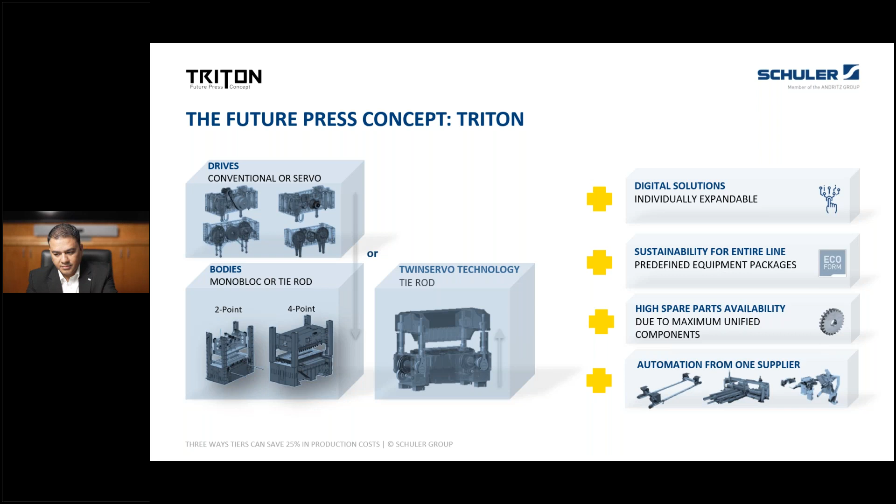When I was talking about the modular design, we all know that modularity is a principle. An immediate example comes of a car. If I want to buy a car and have less money in my pocket, I can still go and buy the basic model and then upgrade it later with whatever modular things are available - for example, a 7-inch screen display on my car.

With TRITON, you get increased output because most of them are built to that extent, like servo presses, and more availability with different automations as well as digitalization. We also have faster setup with offline simulation programs, enhanced flexibility for the dies and the process. You can do certain things offline and then bring it when the press is ready for production.

Reduce training time for new workers - most of our software or programs which come with TRITON presses are intuitive. It gives you enhanced things and they are graphic driven, plus videos. It helps customers and workers pretty fast to come onto a level which is required by the company.

Increased organizational efficiency - you can have the same control, visualization, depending on the different market situation you're in. So new processes, digitalization, increased output availability, and advanced press diagnostics leading to OEE. This is a buzzword now - each and every organization is trying to achieve OEE to the maximum, because they want to make more parts per shift, per hour, per day, or annually.

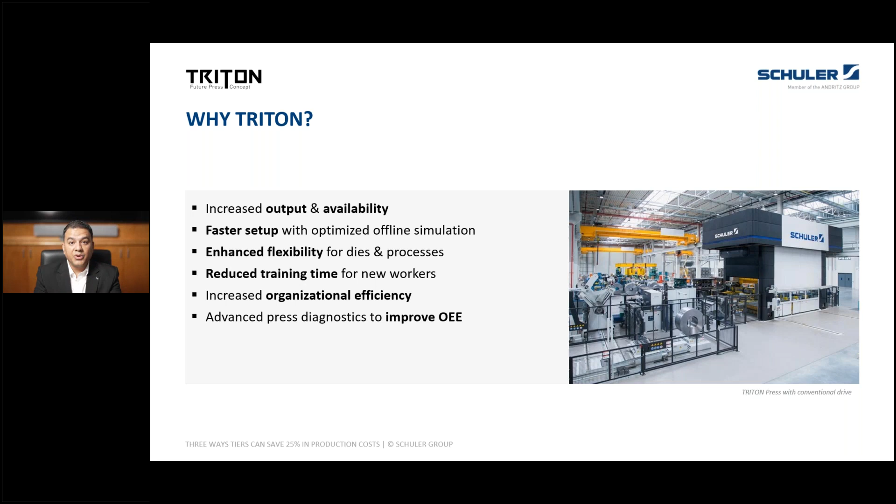So, 3 ways a company can save up to 25% in production costs - we have curated 3 main topics for you all. It talks about technology, digitalization, and operations. Let's take a theoretical example putting it at 100%: technology contributes close to around 70% of the entire cost, digitalization close to around 20%, and operations at around 10%.

Now, most companies have a good amount of skilled labor, so they can do away with things like simulation software if they're already doing it. So you can do away with those 10%.

But when I'm talking about technology, it has subdivisions to it, like rigidity of the press, performance of the press, how much energy saving I'm doing on each part, each component, family of parts, higher efficient motors that I'm using, efficiency of these motors, how much I am minimizing the higher off-center loads, transfer with anti-vibrational damping, which is Schuler technology again, which we will see in one of the videos as well.

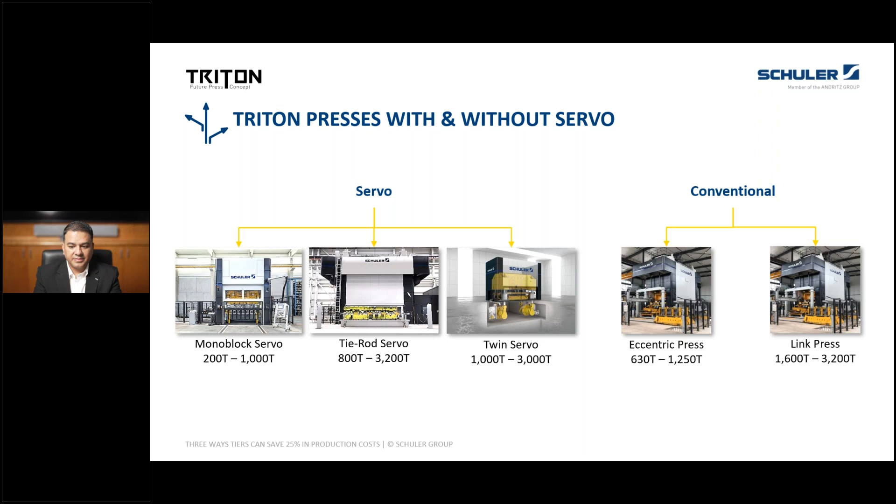Servo presses are quite efficient, directly attached to the main shaft or drive shaft without reduction gears. You get high optimum torque even at slow speeds, and you have water cooling, whereas earlier it was air cooling, which was much more difficult with flywheel presses. You only had sinusoidal waves, so from TDC to BDC it would be constant.

With servo presses you can control how your slide behaves from TDC to BDC. I joke around with customers about this - in humans you've got two main dates, your birth date and your death date, and everyone is interested in what happens between these two dates. So my joke for the presses is everybody is interested in what is happening between the TDC and the BDC. We are all interested in this zone only. That's why with servo presses we get more time for transfer, for lubrication if we're performing anything, and part transfer if there's a rollover in between. We can take much more into consideration with a servo press.

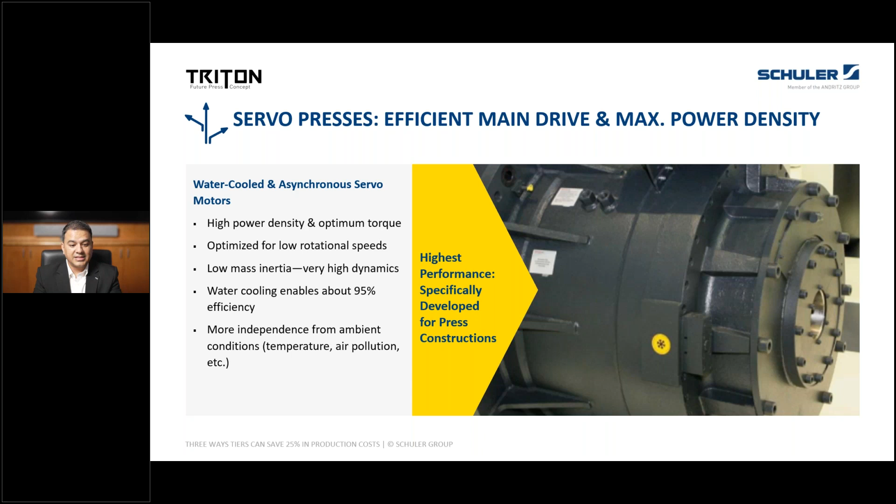Here is an example of the same. On the left-hand side you've got a TML, a link-driven 4-point 1100 ton press with a table size of 5 by 2.2 meters. When I'm talking about tonnage, I'm referring to metric tons, not US tons. The total consumption for this particular press was around 11.04 kilowatts per hour. Let us consider this as 100% of the energy utilized.

On the right-hand side, the center graph, the total consumption using the same 4-point servo-driven press was 8.18, which is close to around 26% less energy. The component was similar to both presses, and we were running at around 14 parts per minute for the continuous run. We measured it with a 4-quadrant counter EVU measuring device, and the measuring time was close to around 15 minutes. So you can see when utilizing a servo press, the energy consumption is approximately 26% less.

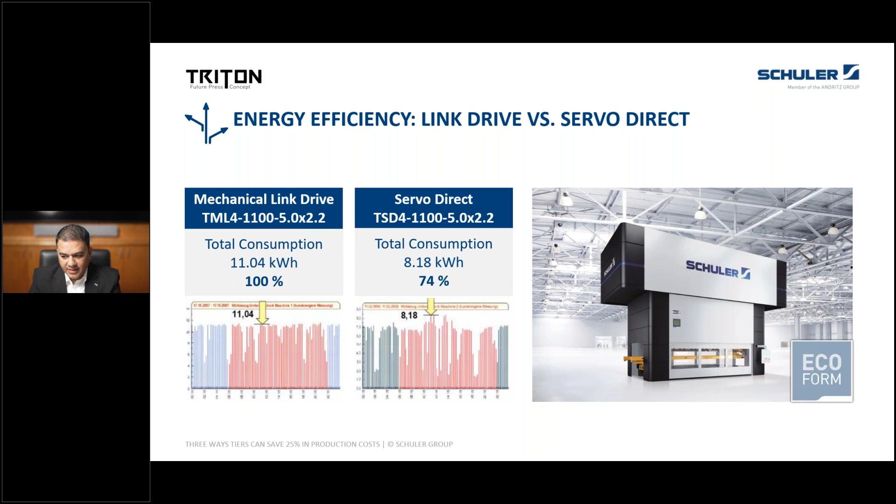Energy efficiency and sustainability are much more important today than they were earlier. Schuler is bearing down all relevant parameters in plant process technology, whether it's a matter of saving electrical energy, cooling water, air, space requirement, machine configuration, process optimization, and many more.

TRITON presses use energy efficient components, like I mentioned earlier. It is standard - most of what's shown on the slide are standard, except the noise absorbing cabin or sound enclosure. Most of the things which are much more common on the European side for less energy consumption are illumination with LEDs, and main drive motors using a torque motor with servo drive, which can be up to around 96% efficiency. There's also hydraulics and powertrain, of course, with optimized mass inertia, fewer moving mass with the gears, and less friction in the crown.

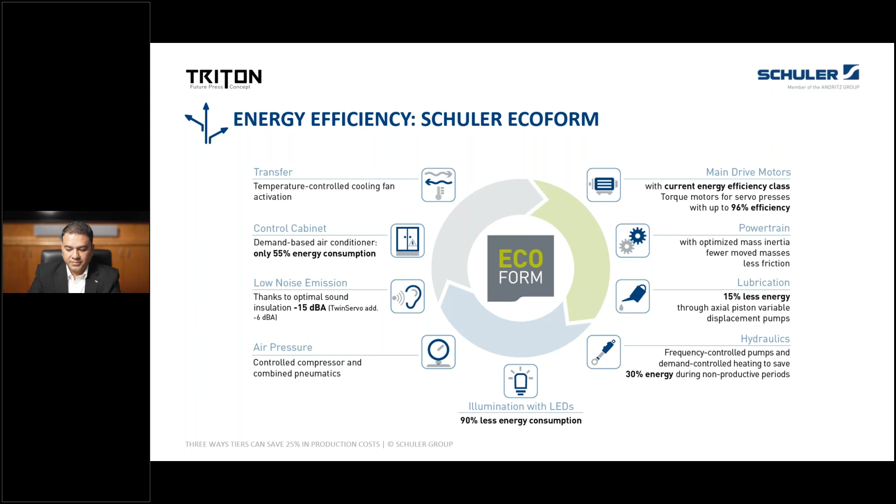One of the packages we talk about is energy monitoring. I've been emphasizing energy much because this is what most companies in the Asian market and European market are much more concerned about, and in which ways it is also coming to the US as well.

With a package like EcoForm Plus from Schuler, you can monitor energy consumption per part, and total energy consumption of the complete line. This gives you the capability of immediately seeing how much energy consumption is done by your machine. You can also quickly and easily identify deviations because you've got historical data. The energy monitoring system creates the highest level of energy transparency.

The production manager might come up with a couple of questions like: what stroke rate is most efficient? How much energy is consumed for one part? What part is causing a problem for the energy? How much energy was consumed during each shift, and so on.

We also have an options package for energy efficiency process monitoring. For the envelope curve, you can have two limit curves, the upper limit and the lower limit, and you can define how your target value looks like. Whenever your tolerance band is crossed, the press shuts down when the set parameters are exceeded.

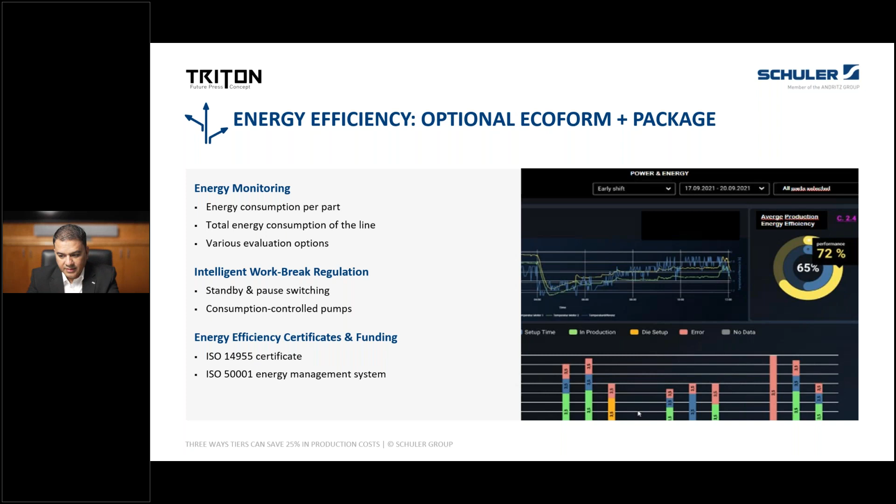One more quick example for the servo direct technology when talking about a powertrain or high efficiency is the comparison of the curves here. This is a 6,300 kilonewton press. We've got a couple of graphs: the dark blue shows the full stroke load run, the light blue is full stroke but in idle run, and the best which we consider is the pendulum stroke. We all know that a higher stroke rate will definitely result in higher energy consumption. Power consumption and component specific energy consumption in the pendulum stroke is much, much lower than the full stroke, especially at high stroke rates.

On the left bar chart you can see the average electrical energy consumption in kilowatts for all three units I specified: full stroke, idle run, and pendulum. The pendulum stroke has the minimum energy consumption compared to the stroke rate it is performing at. When talking about specific energy consumption, on the right hand side, it is still lower compared to full stroke, or even full stroke under idle run.

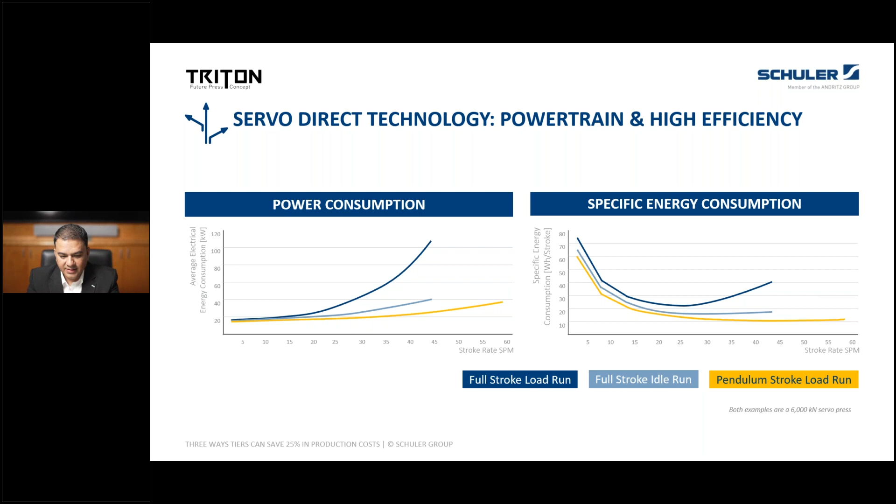Low mass inertia, high force compensation. Most of our presses, or all our presses, use double helical gears, which we also call herringbone gears. These transmit power between the parallel shafts. Herringbone gears were developed to overcome the disadvantage of the high end thrust present with single helical gears. Since it has the opposite helix angle and the gear cuts according to it with a very narrow gap in between, this ensures axial thrust loads are negated.

These are self-centering gears, and that's the reason you don't have any external transverse forces. These are cast wheels and in one piece, which gives better dampening properties, higher stiffness of the drivetrain, and thus also the groove leads to direct power transmission and longer service life.

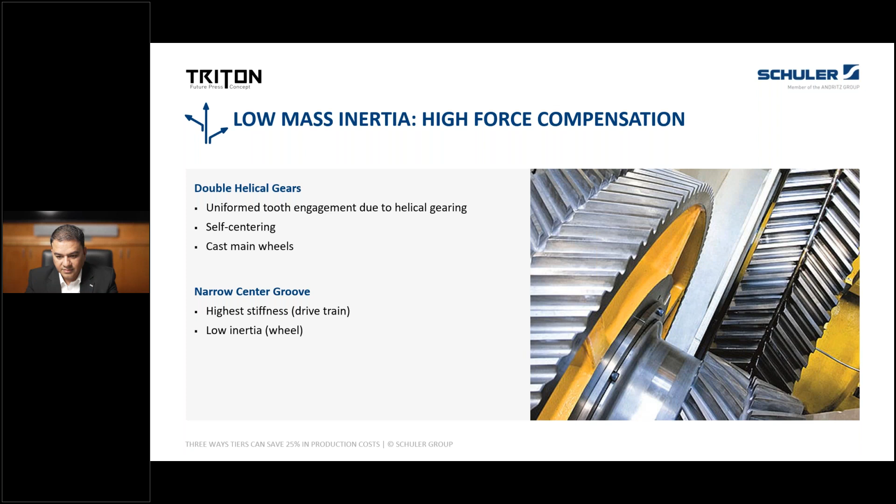One more point most customers are worried about is the high off-center load capacity. With Schuler presses, we have higher off-center load, and permissible forces below the curve are completely usable - that is 100% of the press capacity. The extremely high tilting resistance combined with the reduction in deflection leads to improved quality of parts. It reduces stresses on the dies, so you don't have much die work or repair, and the die life is a little bit more than average dies used on conventional presses.

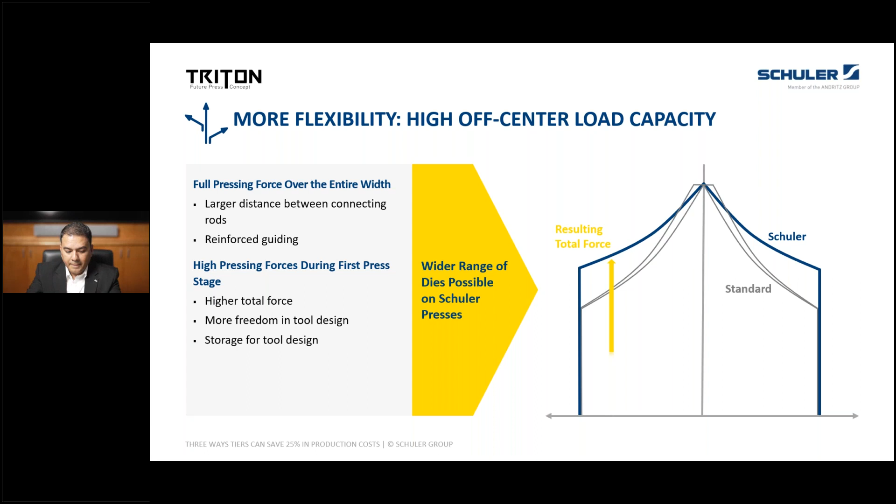Pressure points - Schuler manufactures presses with 2-point as well as 4-point pressure points, depending on the force transmitting element, we have configurations for the pressure points. When an off-center load is exerted by the die on the slide, a multi-point press is better able to adapt or counter the resulting tilting movement, so you get large adjustment ranges for maximum flexibility. Our presses have around 2 inches of overload, close to 50 millimeters overload travel, to protect the press as well as the dies.

It detects loads higher than the nominal and shuts down the press movement. There is an oil chamber which releases during the process, giving time for the slide to brake.

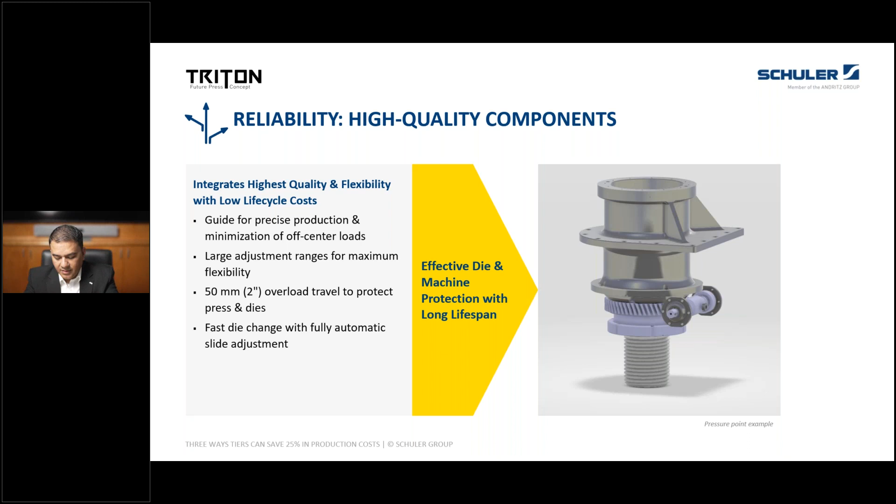Slide guiding - the better the slide guiding, the lesser tilting you have on the press. So 2-point presses are equipped with 8-sided roller guides, which are backlash-free and pre-tensioned. We all know roller guides are similar to ball guides, but roller guides have a line contact with the slide and more load capacity compared to the equivalent size of a ball version, so roller guides provide greater area of contact compared to ball guides.

On 4-point presses, we have sliding guides, suitable for large cross forces. The slide guiding is guided along the entire stroke of the guides.

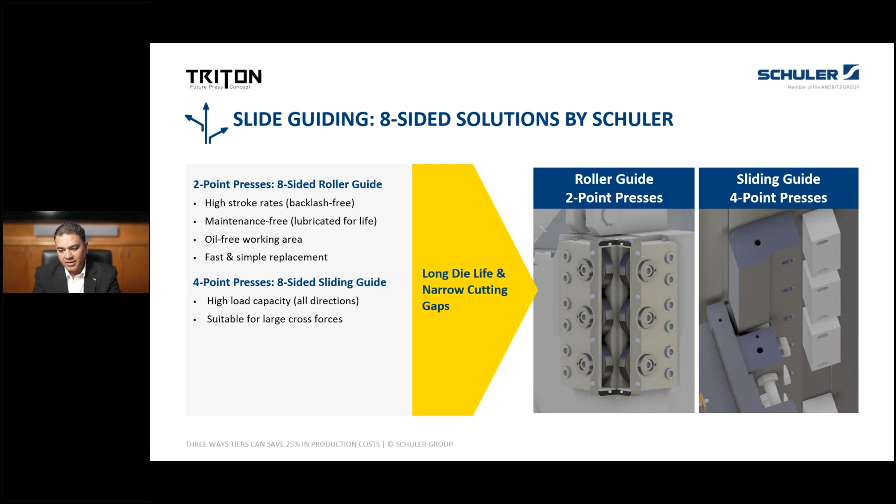Schuler transfer system with active vibration dampening, or AVD. This is also a modular system that Schuler has developed and has been used by so many customers worldwide. It's an asynchronous movement, profiles, selectable clamping boxes, which you can have positions in the entry or the exit of freely programmable axis with perfectly synchronized movements, provides you with the best adaptability for all the components.

4-point and 6-point support offer maximum rigidity of the rail and safe transport of the components, even at maximum speeds. So if you're overlapping most of the automation with the transfer system, you can have a high output close to around 10 to 15%, also at higher velocities and acceleration with less vibration.

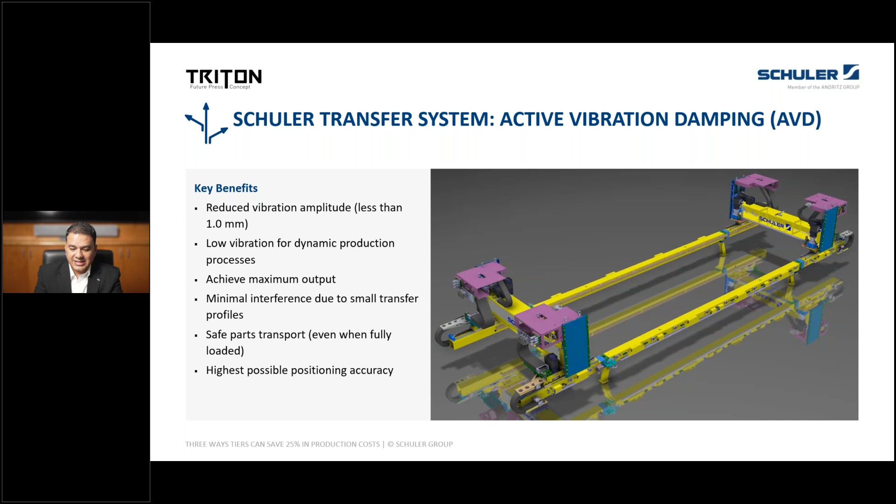I've got a beautiful video for you all over here, which explains how exactly this works. So this particular press, for example, is operating at around 34 parts per minute.

And you can see the vibration which is happening when we have put the AVD off. As soon as you switch it on, within a couple of seconds, you can see the movement is completely gone and stabilized.

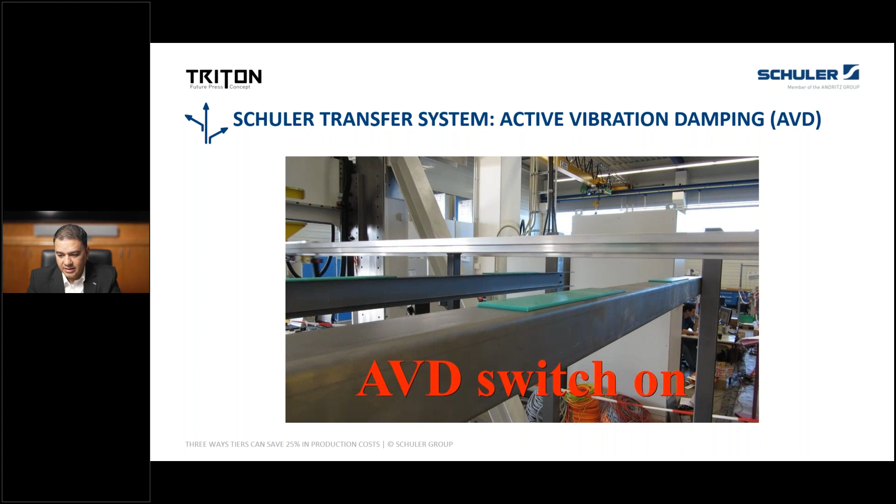So the x-axis is close to around 800 millimeters, the y is 200, and z, the lift, is close to around 50.

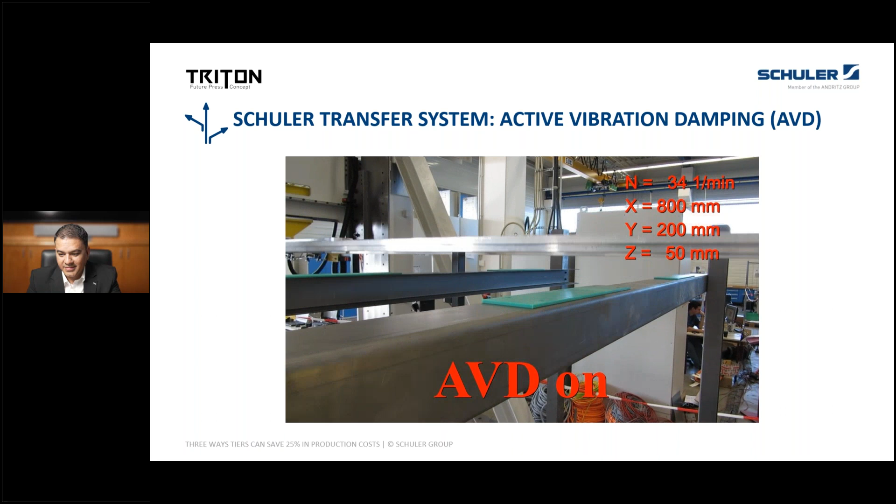And plus, the electronic overload protection of the transfer system guarantees a safe shutdown and axes do not have to be recalibrated again.

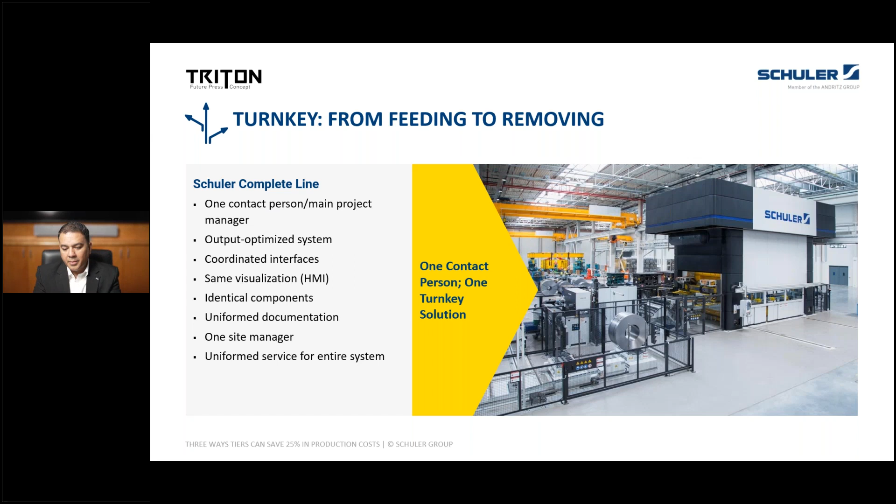Like I mentioned earlier, Schuler is always present as a turnkey solution provider from feeding to removing. So with Schuler Complete Line, you can have one contact, the main project manager. Output optimized, you've got the same visualization, the HMIs almost identical for all the presses throughout, so it is so intuitive that the workers as well as the on-site managers have very easy operability of the HMIs and the visualization.

Going on to the next topic is the digitalization.

So we're talking about the overall equipment effectiveness. This is a production monitoring which we have on most of our presses. We all know that overall equipment effectiveness is like a standard for measuring manufacturing practices. Now, theoretically, if we multiply all the factors together and propose an OEE of 100%, that means you're manufacturing only good parts as fast as possible, with no stop time.

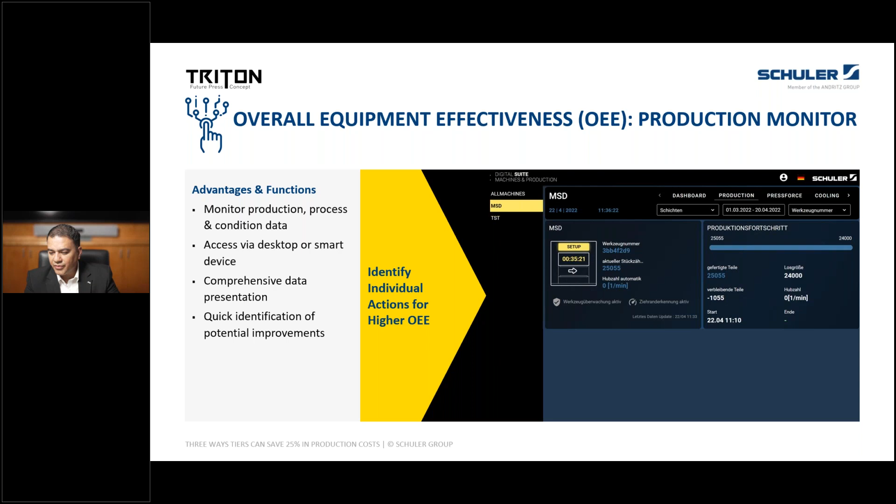Another screenshot talks about how much time the machine was under production for each and every die, how much time it was under non-performance, and how much time it was under the setup mode as well.

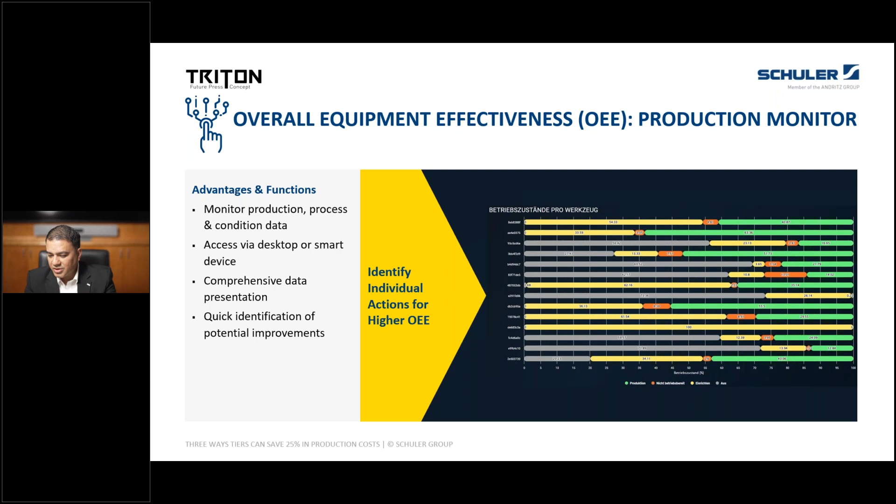Overall equipment effectiveness can also be done with one of our camera-based monitoring systems, which is VDP, visual die protection. The beauty of this product is it can also be implemented or programmed onto a non-Schuler press, so it is not Schuler related. It's a separate digital item, a camera-based monitoring system that can protect against tool damages and machine downtime, and it can save costs up to around 10%.

With this camera-based system, you can detect foreign objects which are present. Of course, there's maintenance happening on the dies, and sometimes the maintenance guys can leave spanners, or there is a missing part. There is process inspection, in-process checks, monitoring of critical die functions, and so on.

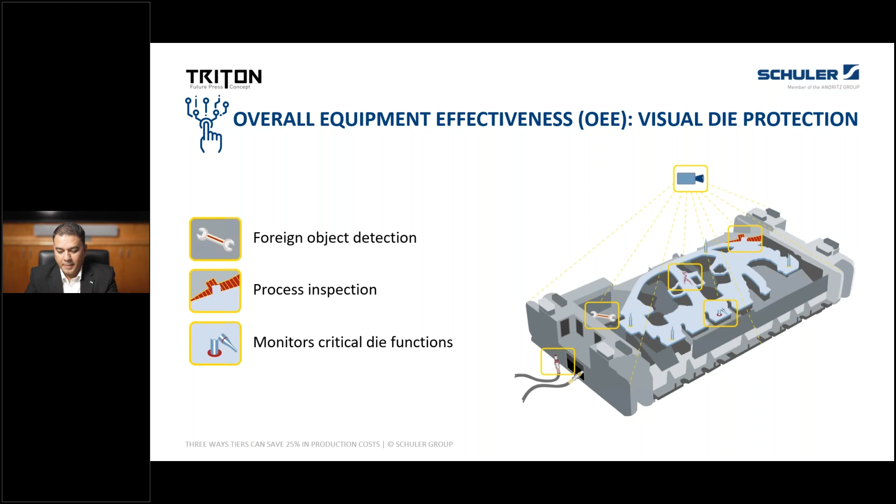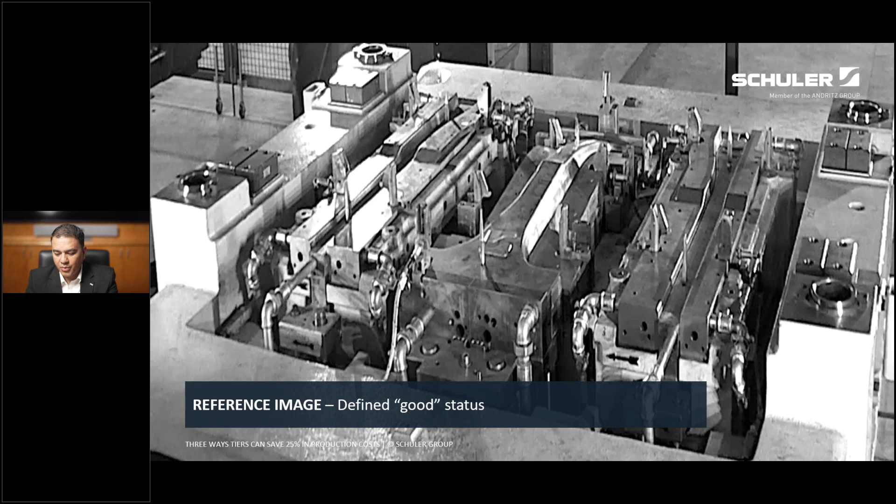So the first time when you put the VDP into it and you're about to go for production, you make a reference image. This is called the good status of the die. I will be going forward and backwards through these two slides multiple times because I want to show you how the anomalies work.

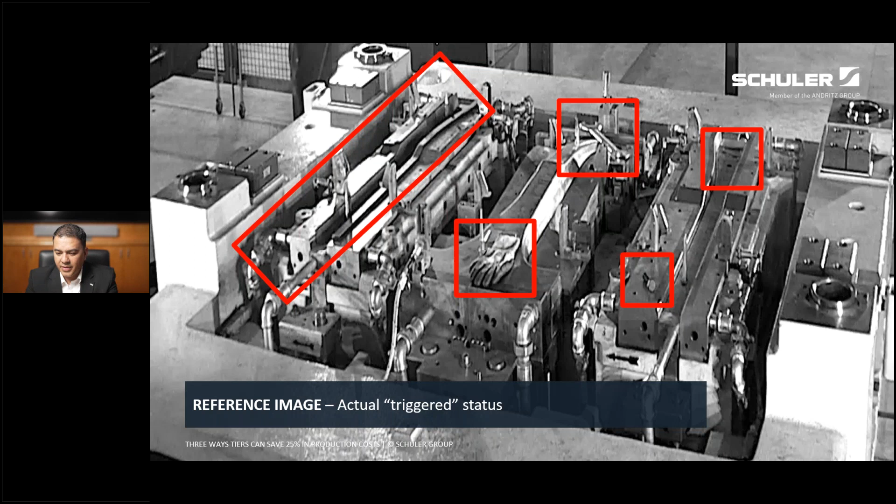So on the left-hand side top, the part was not taken out either by the operator or a robot. You can see on the part on the left-hand side there is a glove left by the maintenance guy on the die, a spanner, and also a pin which fell loose on the right-hand side. This is the actual triggered status. Every time there is an anomaly, it sends signals to your press and the press shuts down or stops immediately.

I've got a video for this, which I'm going to play for you.

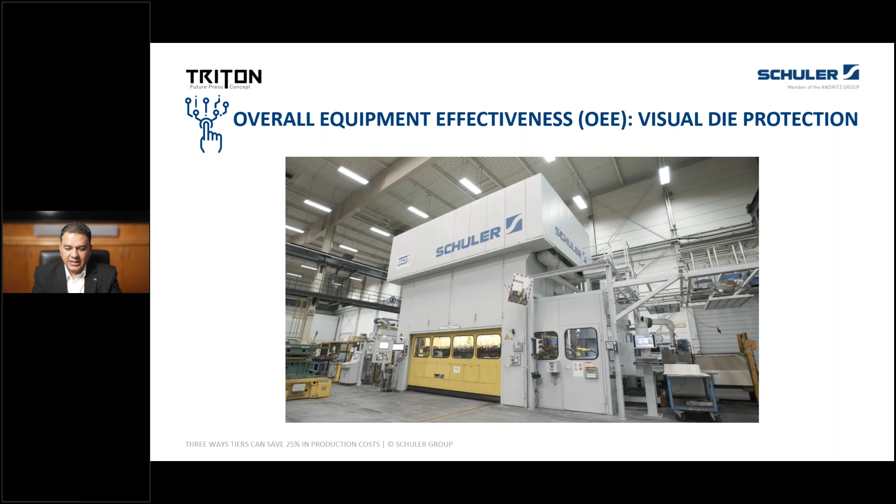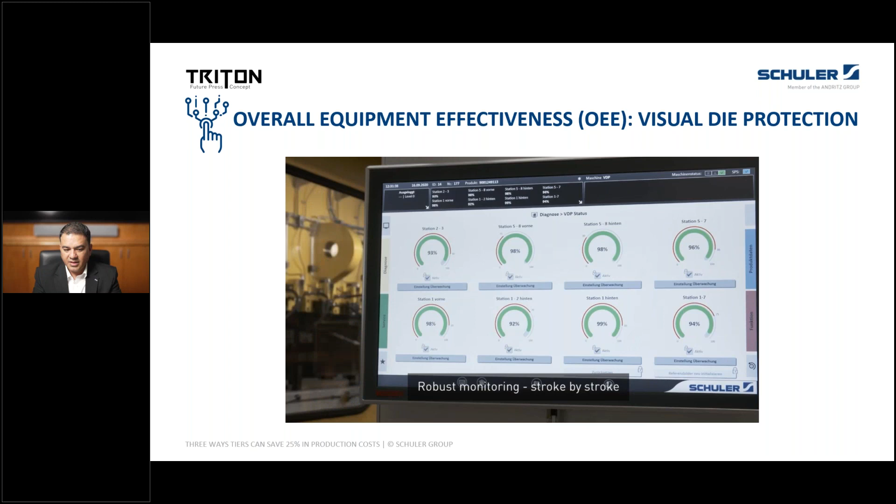With VDP, you can put up to 8 monitoring functions on one particular die. You can select the camera, the time, the image area, and specify the limit value for that particular critical deviation that you want. So the cameras then start monitoring the press when it is in function.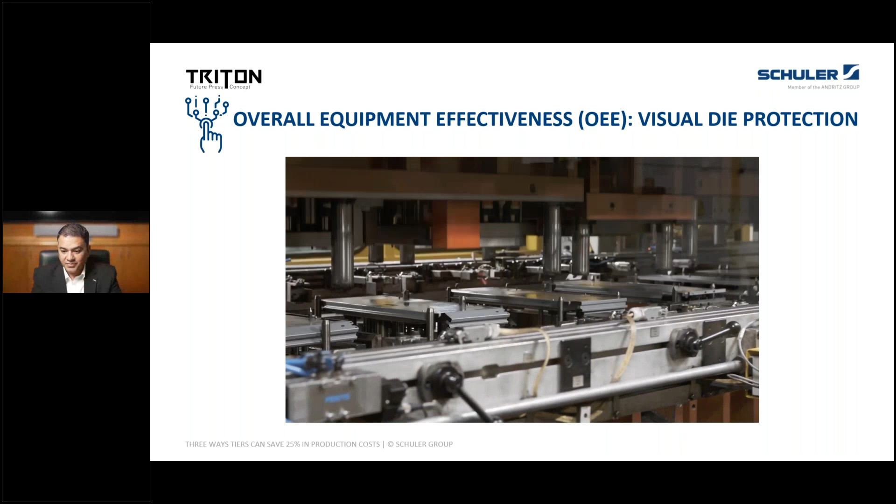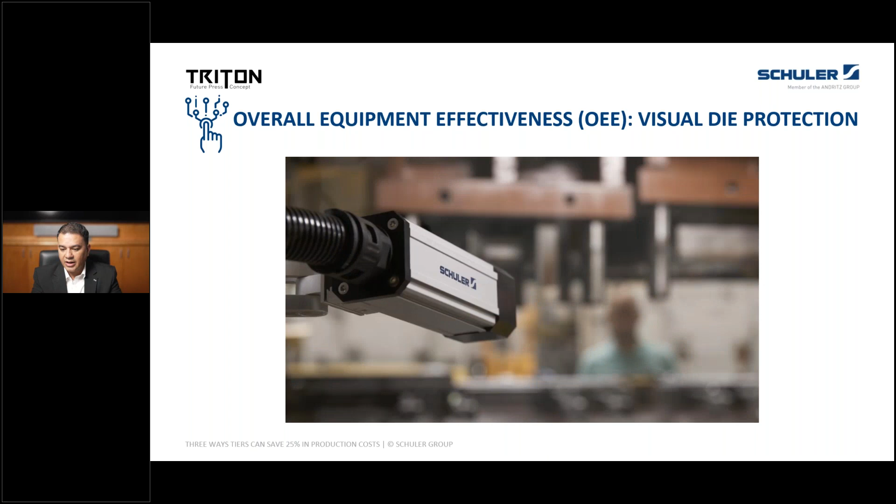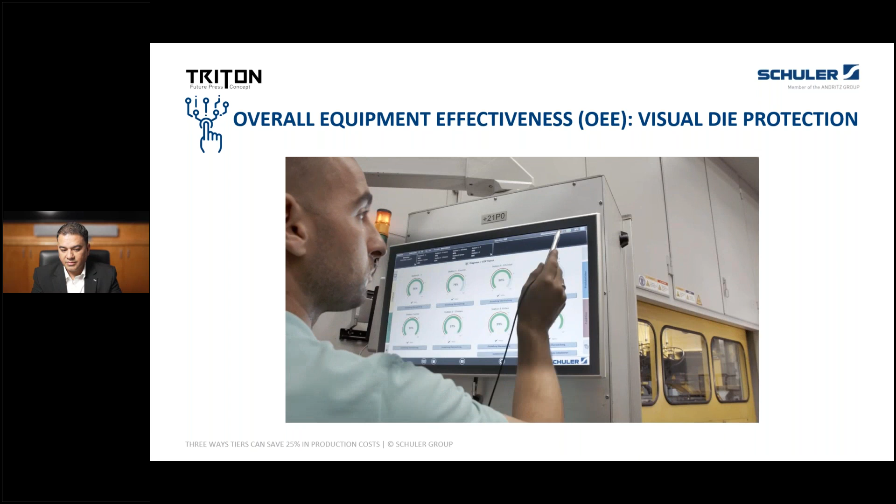Whenever an anomaly happens which you have taught, it will immediately tell you what exactly the anomaly was. You can go in, correct it, and restart the press again. So live images are compared to the reference images at defined times and checked for the critical deviations that you have.

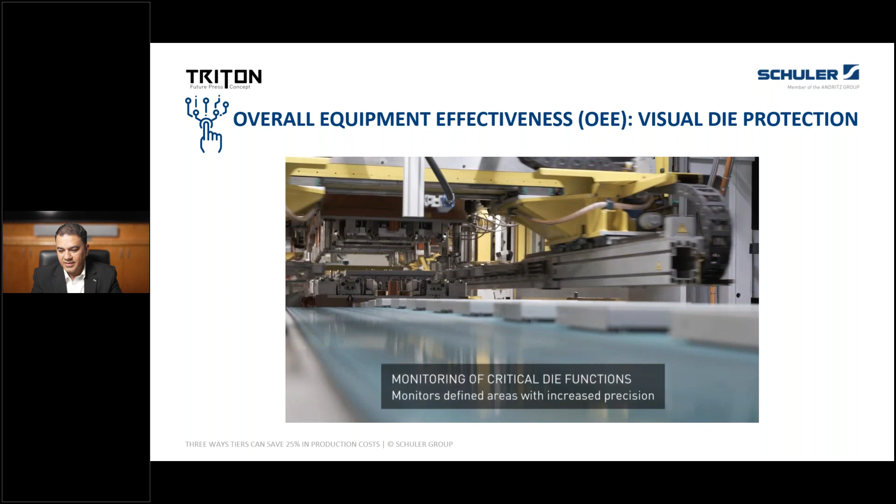Let's move on to the next topic, that is operations. Under operations, Schuler has got a couple of online as well as offline programming tools, like the Optimizer Pro. The Optimizer Pro is a basic curve generator, meaning you can program everything offline and then push it onto the Smart Assist, which helps record die-specific parameters for the press and the transfer setup, plus you can do the optimization.

With the Optimizer Pro, the transfer angles can be calculated automatically. Movement profiles of the slide can be designed freely in regard to the stroke height, form, as well as speeds.

The Smart Assist is a software that helps record the die-specific parameters for setting up and optimizing the press as well as the transfer. And it takes all the calculations that you have already done under the Optimizer Pro.

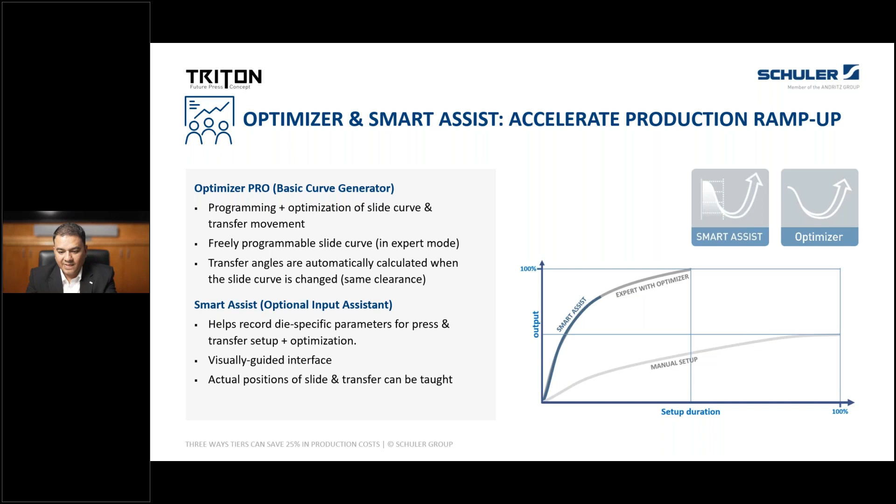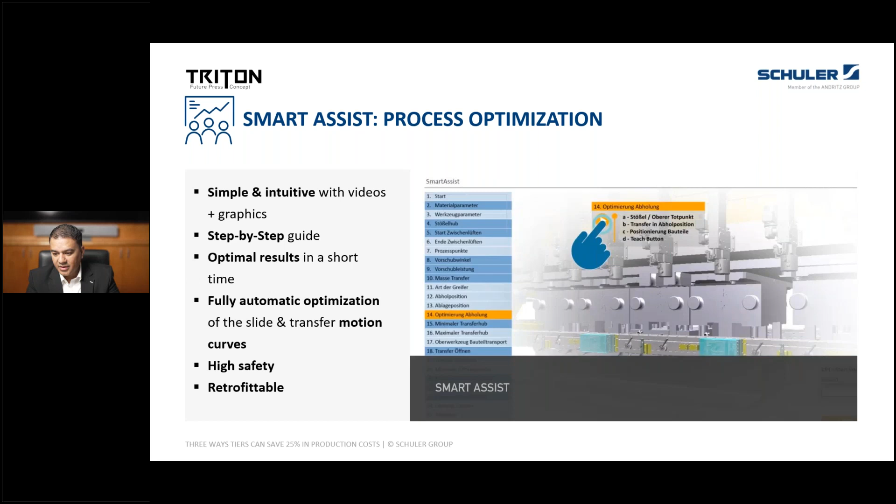Let me take you through one more video, which is simple and intuitive with the graphics. Like I said, for new level workers as well, this is absolutely simple to go through. Under Smart Assist, you go to the production data, you select the Smart Assist, and you get a bunch of options.

You start clicking the one which you want to optimize for your particular transfer, and it will give you step-by-step information as to what exactly you need to perform.

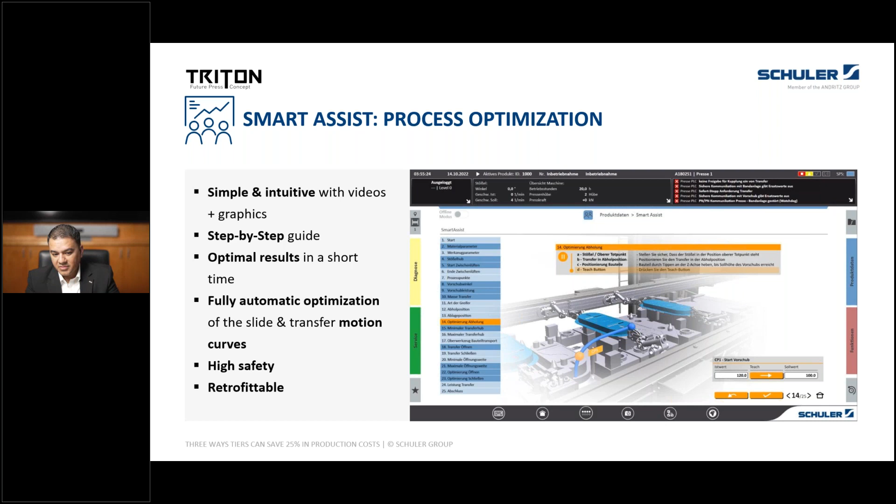You open the slide, ensure that the position of the slide is at TDC, position the transfer at the pickup position, lift the parts by jogging it in the Z axis until the target feed movement is achieved, and register that target and put it into the teach function. Once it is absolutely clear of the tolerances, it takes care of it.

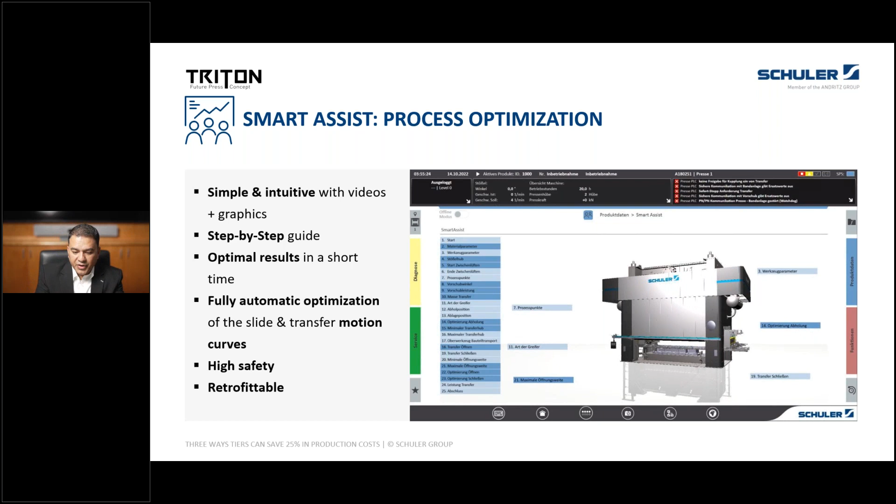This is also beneficial for easy creation of new die programs when they come in, or new part programs that you're developing for the OEMs or tier 0.5. Data is recorded directly with the teach-in function on the press control panel or a smart device. It is fully automatic because you're taking all the data from the Optimizer Pro.

This particular Smart Assist is also retrofittable, but it all depends, because if you're having presses which are too old, most of them do not have, for example, an Ethernet connection. So we can figure that out, but it needs diving into the specific situation you're currently in.

DigiSim Unlimited is an offline virtual production ramp-up software. This is an offline simulation. It can be for a progressive die as well as for transfer presses. This is an add-on to one of our simulation programs, which we call Transfer Basic. It also has beautiful features like programming of additional movements if you have lifters, rotating grippers, kinematics, which are completely different depending on what you want to do from one tool to another. It also has automatic collision control.

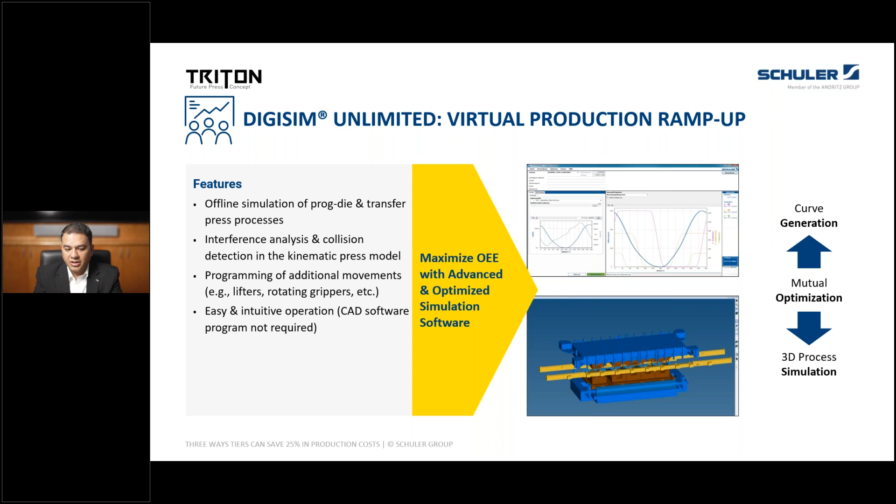DigiSim has generations of all necessary processes. It has reliable output calculation for better pricing of the part. Die data can be prepared, optimized, and managed offline. So if you have got a new die or a new part set which you have to prove out, you can do it offline to the absolute last level and then push it onto the press.

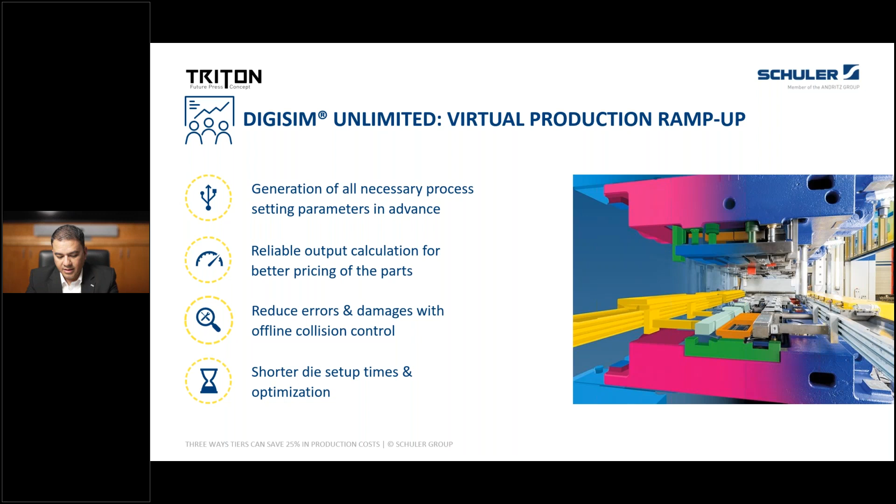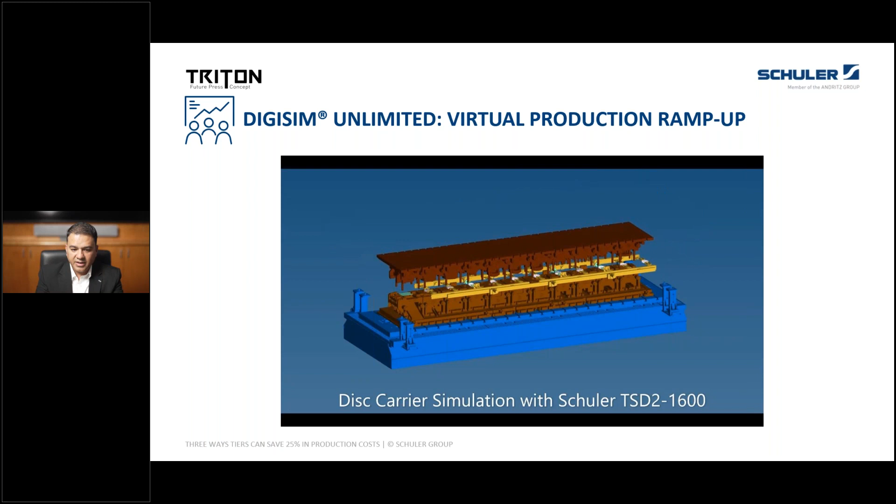To explain this, I've got a video. This is a simulation done on our servo press, 1600 ton, with a medium duty transfer system.

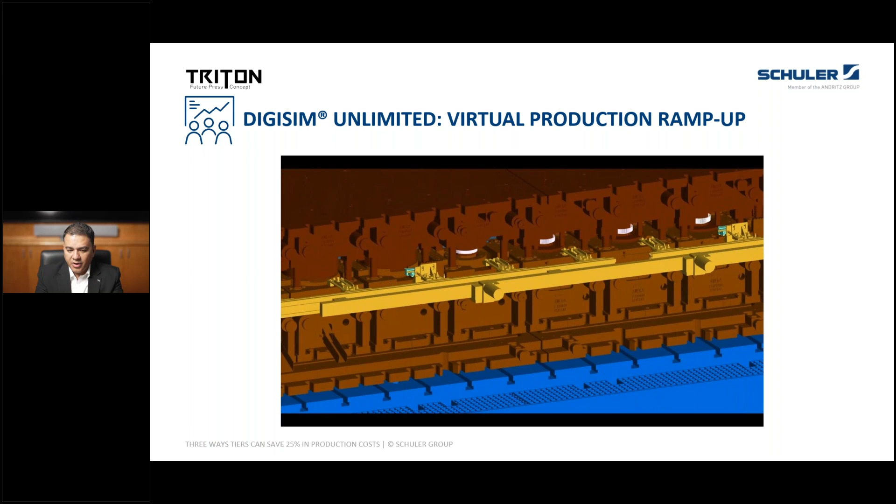You can see you can operate the press at different stroke levels and see exactly how you can ramp up the production, at what speeds you're operating, whether it's 160 millimeters before BDC or after — you can go up to 240 millimeters per second.

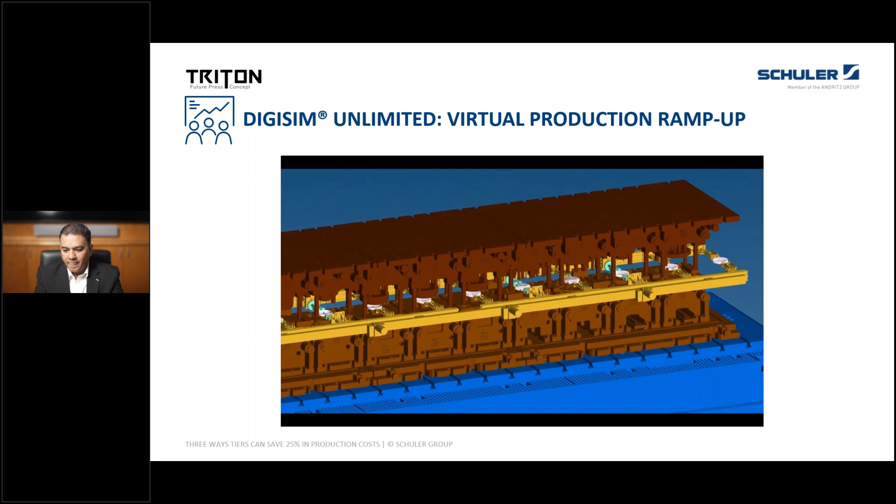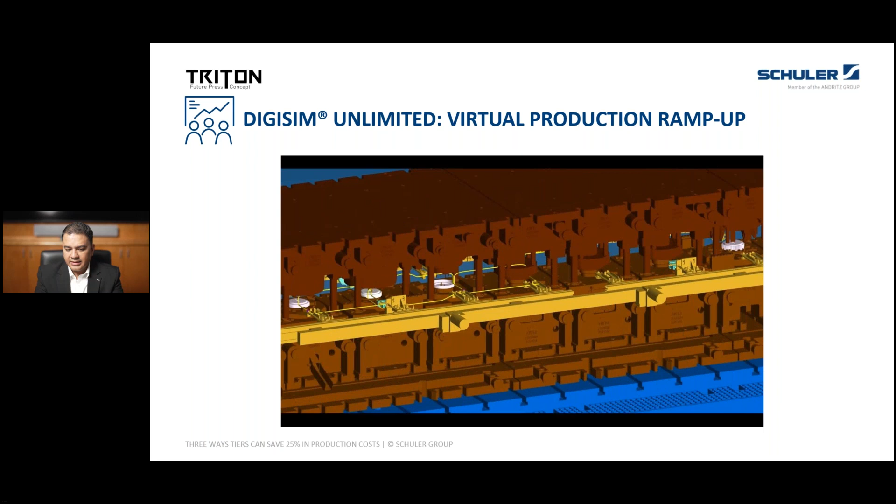The transfer movement is optimized with overlapping motion of different axes. Here you can see the same speed forming as a conventional press. If you're operating that, it would do around 9 parts per minute.

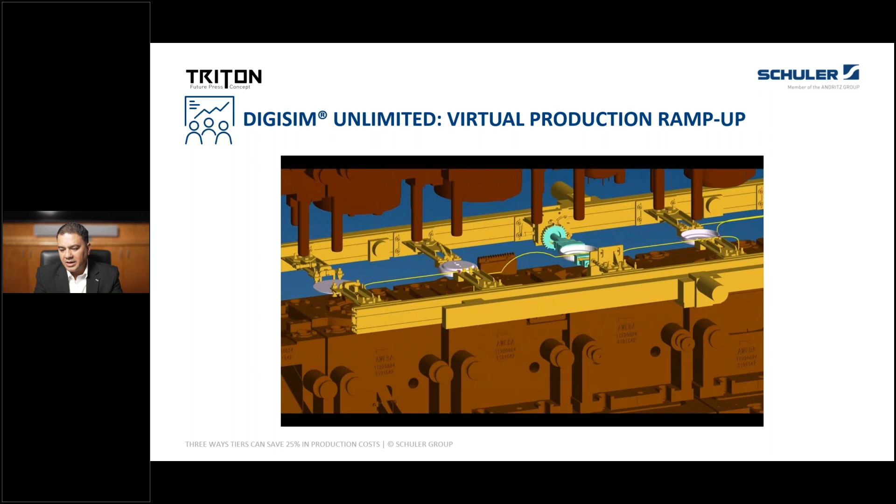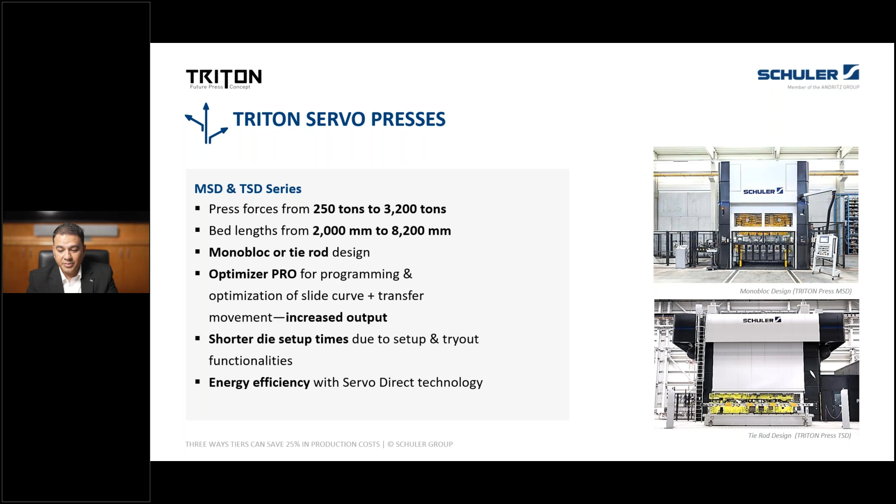And that brings us to the end of the presentation. I hope you were okay with whatever was shared, and thank you for being patient listening to our presentation. Just to recap quickly, we have the series, like the monoblock design and the tie rod design. We have press forces from 250 to 3,200 metric tons. Comes in a monoblock or a tie rod design, with Optimizer Pro for shorter die setup times, and the TSD version.

Worldwide, it's unique because it's got the servo motors in the pit. That's how you get around 30% less spring back on most of the components you're manufacturing. It has significantly higher off-center loads with the same press force. And of course, with the flywheel or conventional driven presses, we have eccentric as well as link drives. Eccentric drives go up to about 1250 tons, and from there up to 3200 tons, we move into link driven presses.

And if we have any questions, I can answer them now.

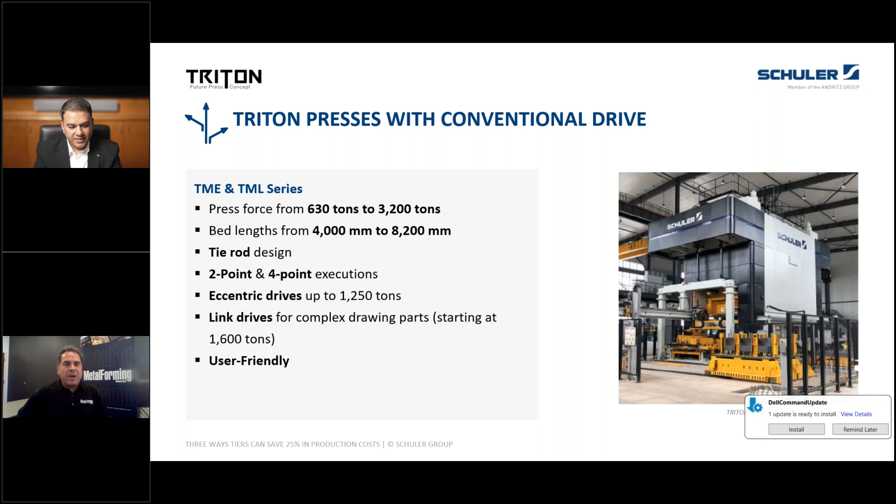I do have a question for you. I found that EcoForm functionality pretty interesting, and certainly useful for ESG reporting, which is becoming more important as time goes on. If I heard you right, you can capture energy consumption by job number or part and report that back to the customer, right?

Yes. So are you seeing that being done currently, or is it coming down the road with some of your customers? Yeah, whatever percentages I've been stating during my presentation, that was all from a brainstorming session we did internally at Schuler. We also got the analysis done with customers who are already using our servo technology or the TRITON series presses.

Fantastic, great. So what more can you share with us about the trends you're seeing in terms of press size by force or bed size, and any comment on the challenges those trends present to manufacturers?